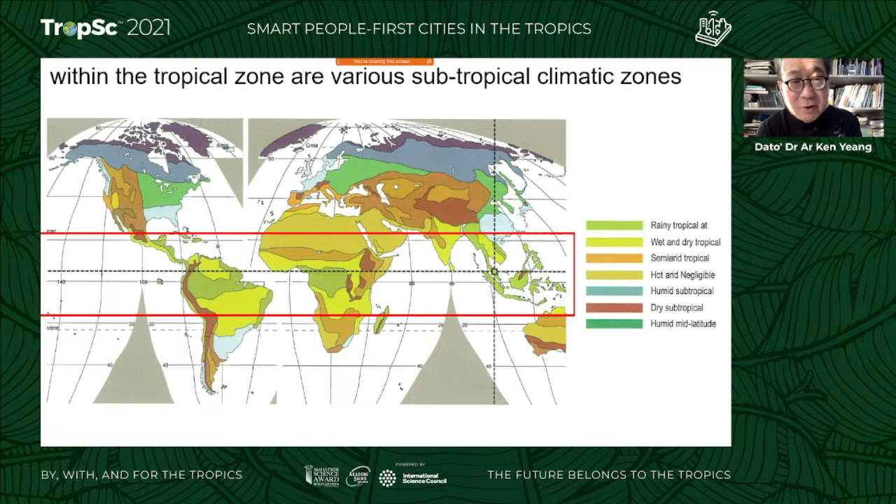Now, bioclimatic design, which is tropical design, is a subset of ecological design, and these are the key factors. Tropical design is generally built this way, but it's not exactly all the same, because you have hot humid tropical, subtropical, and coastal tropical. So even within the tropical zone there are minor variations which we have to take into consideration when designing for the tropics.

I'm going to show an example in Singapore. Singapore is about 1.2 degrees above the equator, so it's more or less spot on the equator. The temperature is more or less consistent throughout the whole year, whereas rainfall changes significantly towards the end of the year.

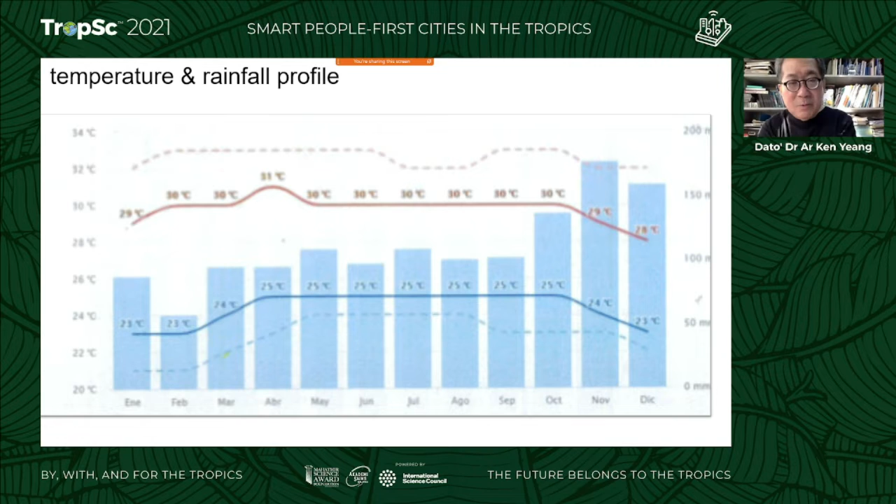So the key factors in bioclimatic design is climate—you have to design to the climate, obviously. We don't have many seasons in the hot humid tropics, whereas in other latitudes you have seasonal variations. You have rainfall, humidity, soil, insolation, wind, and acceptable levels of comfort for people, and it's variable depending on where you are and who you are.

And thus build form orientation is important because that affects building performance, building configuration, the shape of the building—whether it's rectangular, circular, or square. There's thermal control, glare, wind and natural ventilation, facade and daylight penetration, energy, and other factors.

Now, if I relate this to the other ecological design diagram, it relates to nature, human comfort, the built environment itself, and of course energy. Water is less of a factor in tropical architecture except for rain.

The easiest way to understand tropical architecture is to look at the traditional architecture of a locality, because it was built and derived through trial and error, through intuition. Here's the image of the Malay house in Malaysia. The key components of the Malay house are a perfect example of tropical architecture in the hot, humid tropics. There's a sloping roof to keep out the rain, and deep eaves to keep out the sun.

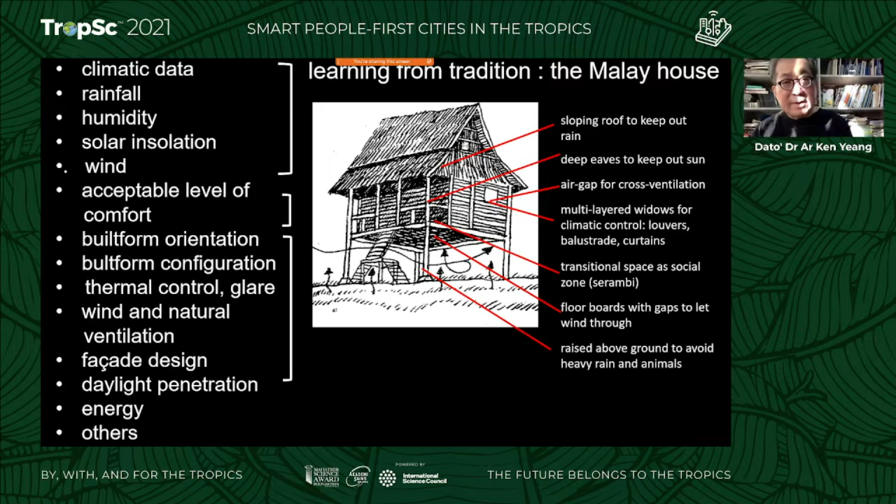And so now I'm going to give an example, a case study of a building that we just completed a few years back. It's in Putrajaya, which is the capital city of Malaysia. Putrajaya is 2.9 degrees above the equator, and it's in the rainy tropical zone.

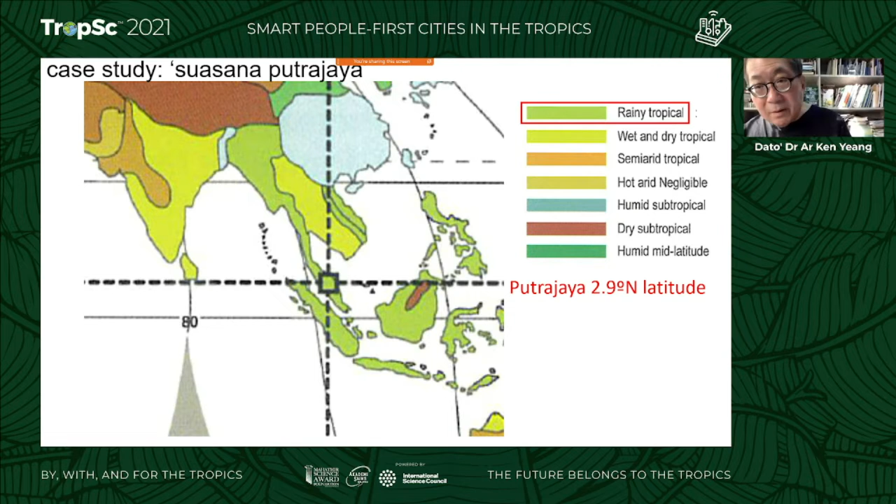On the left and right-hand side, these are the different types of tropical climates. So when you talk about tropical architecture, we need to be more specific, whether it's wet and dry tropical, semi-arid tropical, hot and negligible, humid tropical, or dry subtropical, or humid mid-latitude. This is the building that was completed about 3 years ago.

It's next to the bridge, and it is actually two almost symmetrical buildings with a gap in between. The gap is the axis between the roundabout, which is the Dataran Wawasan, leading down through the Millennium Monument by the waterfront.

Now, the traditional way of keeping out the sun is to use horizontal louvers. We wanted to experiment and try something different, so we started to explore the use of fritted glass as a shading device in the tropics.

So what we did was use glass which is not exactly butt jointed. They are put close to each other, and then they have a fritted pattern covering about 50% of the glass. To reflect Malay culture, we took the songket pattern, a traditional fabric weaving pattern, so that you're reminded of the culture of the locality, and it gives respect to the culture of the country.

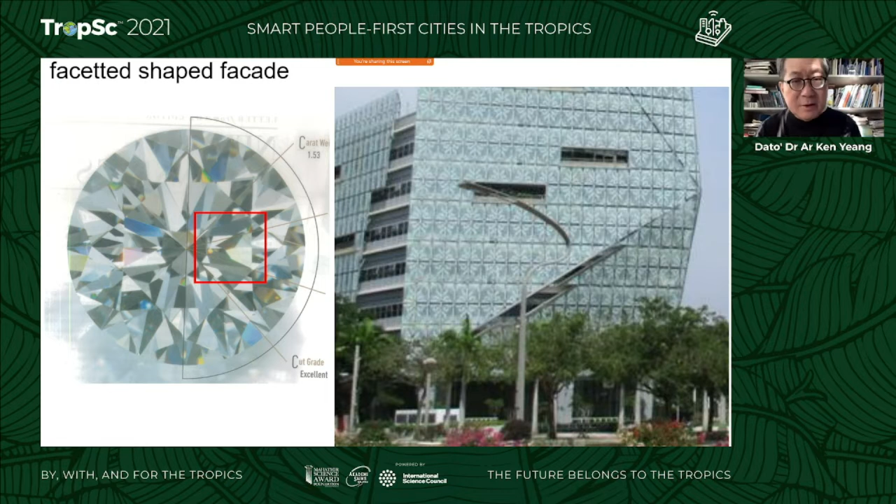Because this lies along the boulevard that leads to the Prime Minister's office, we wanted to make it upmarket, so we faceted the facade like a gem. The building is almost like a gem in Putrajaya.

Now this is a sun path in the tropics. The first thing you do in tropical architecture is look at the sun path. The sun is almost above the equator. It starts in the east, and depending on the time of year, it's a little to the north or south. A third of the time it's above the building, and a third of the time it's in the west.

But the hot time of the day is probably from 3 o'clock onwards, so we have to respond to that. Morning sun is hot, but it's not as dense and uncomfortable as the midday or afternoon sun.

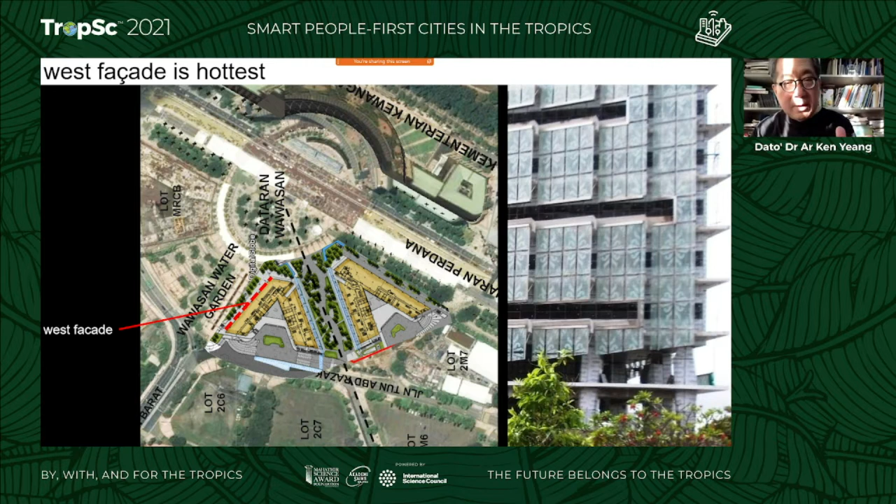This is the full west facade. The slots are where balconies stick out, so people from inside can go out to the balcony, and the balconies are to be planted. This was taken some time back, so the planting cannot be seen in this early photograph. But you can see it's not flat; it's angled to keep out the sun from the inner sides of the building.

There it is. You can see the roundabout on the right-hand side, stretching all the way down next to the monument. It lies along two axes: one is the main axis leading to the Prime Minister's office, and the other is to the monument by the waterfront.

Here's the axis to the monument. That's why the building is not one big mass, but actually two buildings, and what is left of the land effectively determines the configuration of the building. We don't want any part of the building or the center of each office space more than about 7 meters from the glass wall, otherwise daylight cannot penetrate the inside. So what we get is two asymmetrical, V-shaped buildings, and the dotted line shows the axis leading down to the monument.

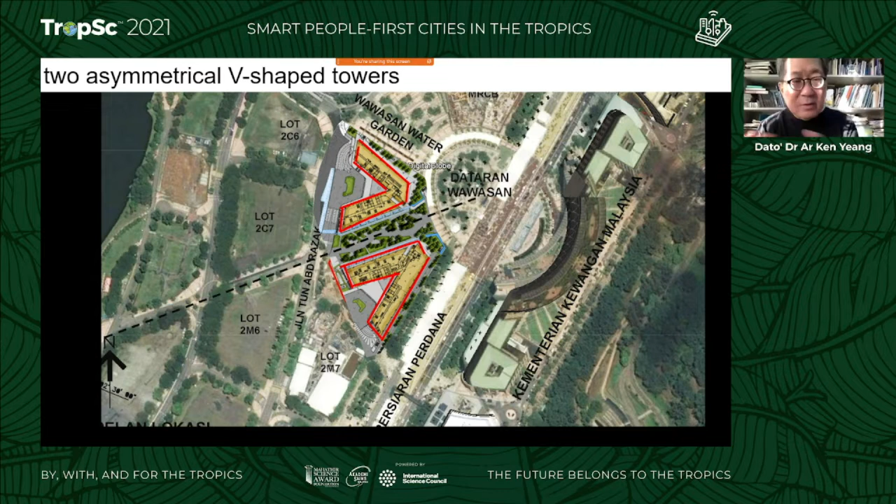So there you are. There's the monument right at the waterfront, which was also designed by us about 8 years earlier, and that explains the shape of the building, because the axis starts from the Wawasan roundabout, going all the way down to the waterfront.

And in between is the open space, the promenade, and we have a seating area. Off the promenade, underneath the building, are outlets where you can have restaurants. People can eat and drink and enjoy the space in between.

This is actually a very popular space, especially during Independence Day. So you can see the monument at the end.

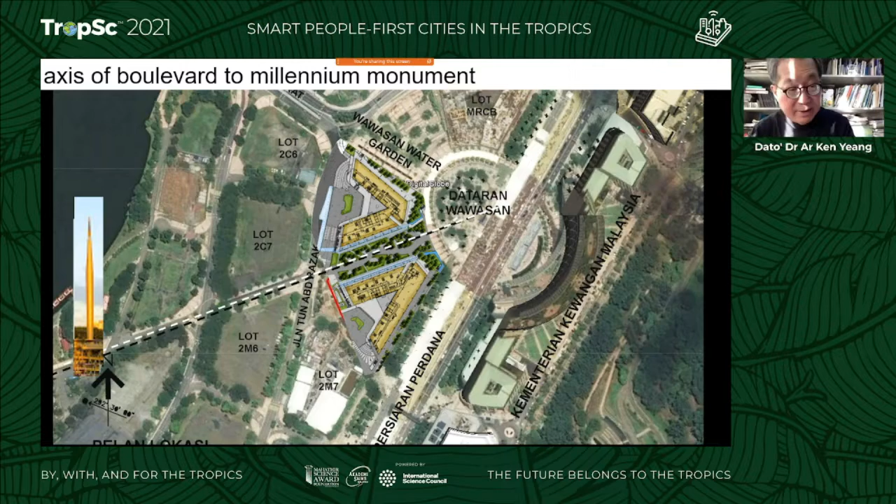Now, what is this? Sorry, you want us to end now?

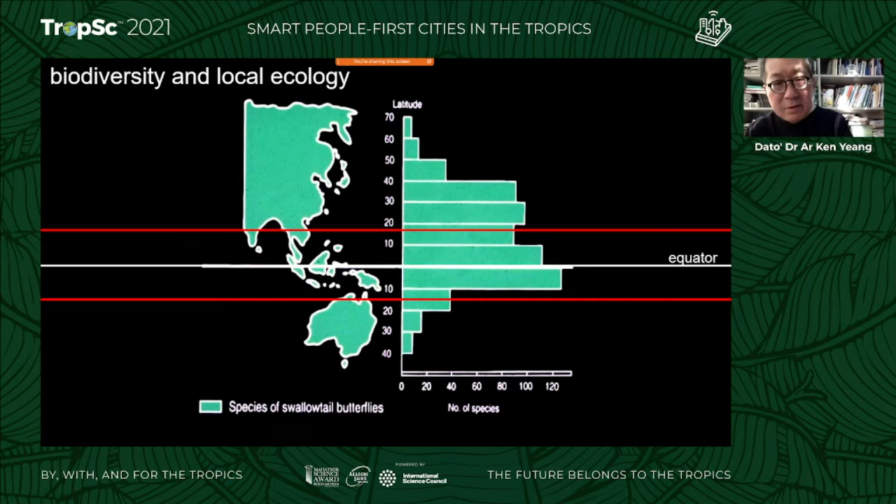Okay, so this is the biodiversity and local ecology, and you can see by the equator that the biodiversity is higher. And so to address the ecology of the planet, what we do when we design is we create habitats.

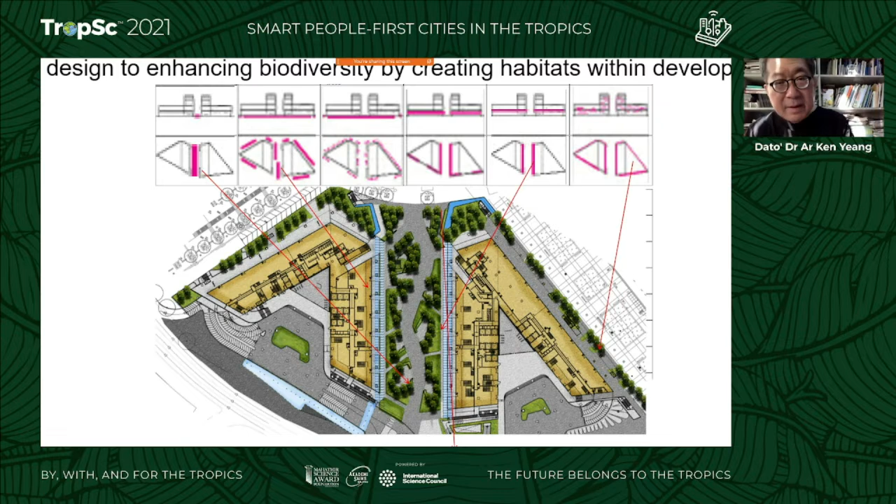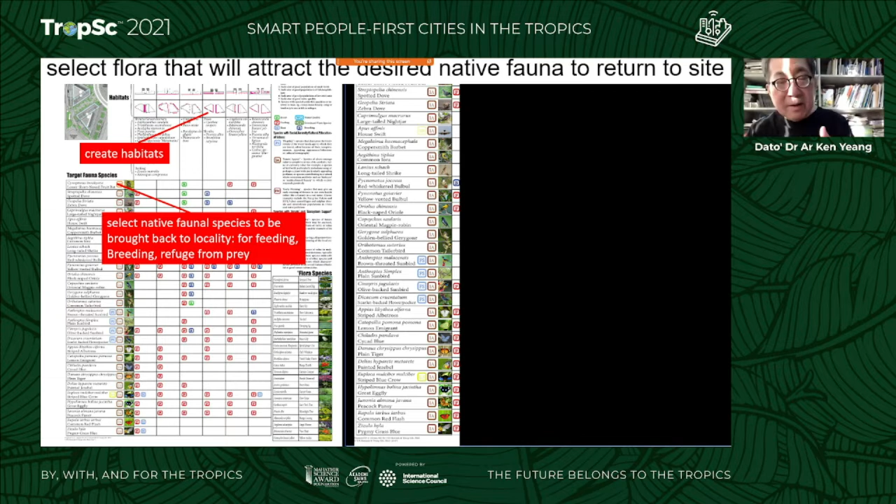On our top axis, you can see all the habitats in different parts of the building. And then we try to identify the fauna that we want to bring back into the site. From there, we identify the flora to attract the fauna. So in this way, we have a system for enhancing the biodiversity of the locality.

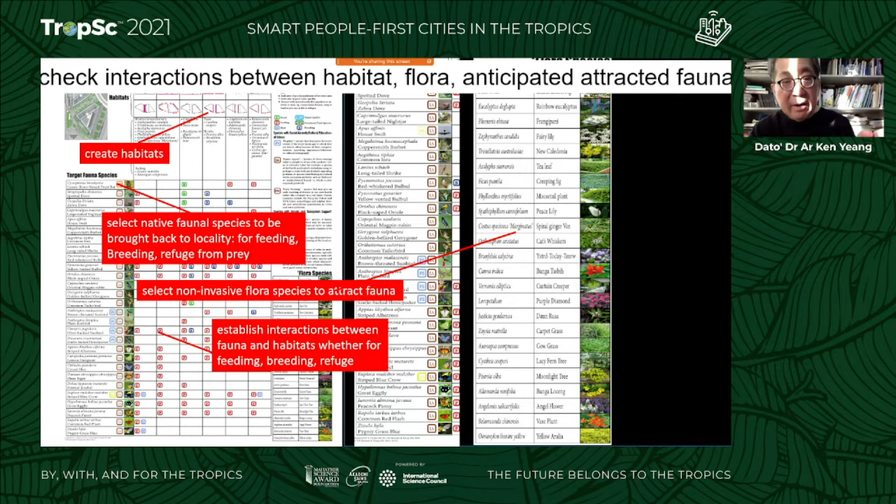But before we started the building, the land was already cleared. It was just brown soil, and they removed all the vegetation. The rainforest was there before, the palm oil was there before. So the whole idea of ecological design is to bring back biodiversity and to enhance the provision ecosystem services.

Yeah, Dr. Ken, maybe we can pause here for a while, and then when we do our discussion session we can come back to your... No, Sophia, I'll just do 2 more slides and I'll finish.

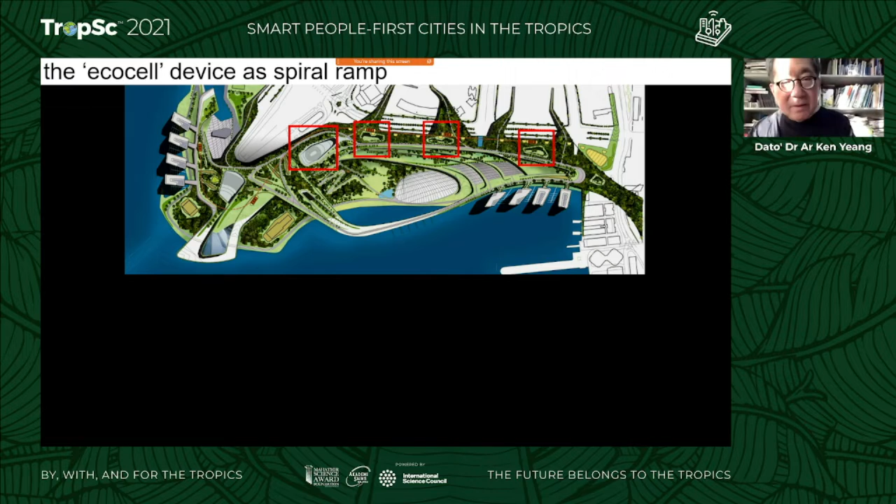One of the devices we had in the scheme is what we call the EcoCell, but we don't have time to discuss this. EcoCell brings water, natural ventilation, and daylight to inner parts of the building. This was the Kowloon waterfront scheme that we did a long time ago, a few years back.

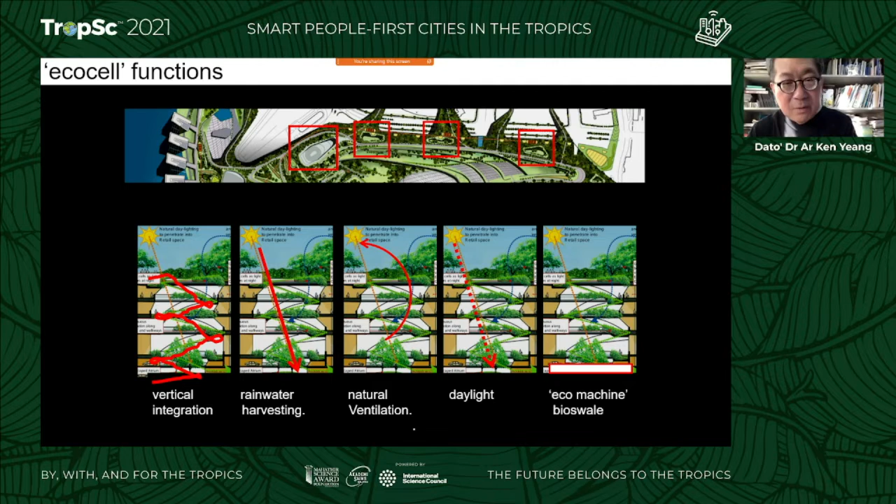But for the Putrajaya project, this is where the EcoCell is. You see, if I change the slide it will be much faster, but you want to change the slide yourself, so that slows everything down. Yeah, so this is the EcoCell that goes all the way down to the bottom of the building.

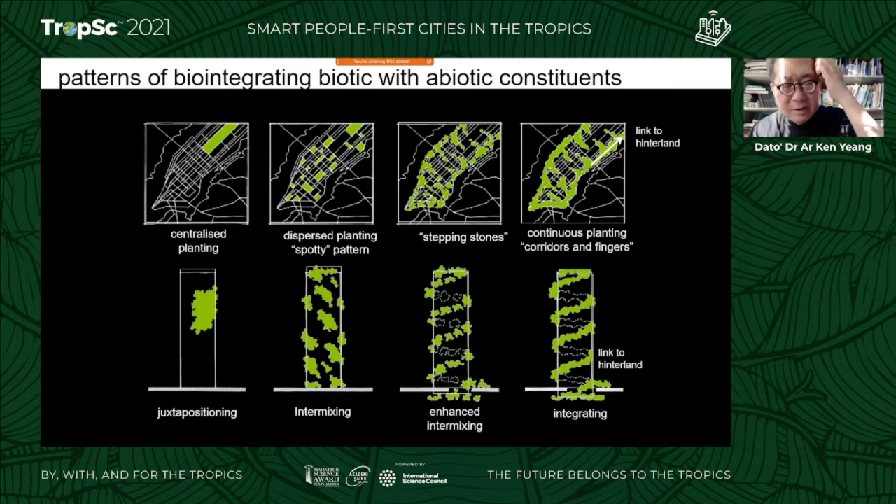And for the vertical high rise, we create habitats. This is bringing biotic constituents back into the building. These are the different patterns we use. The one that we adopted in this project is the one on the right.

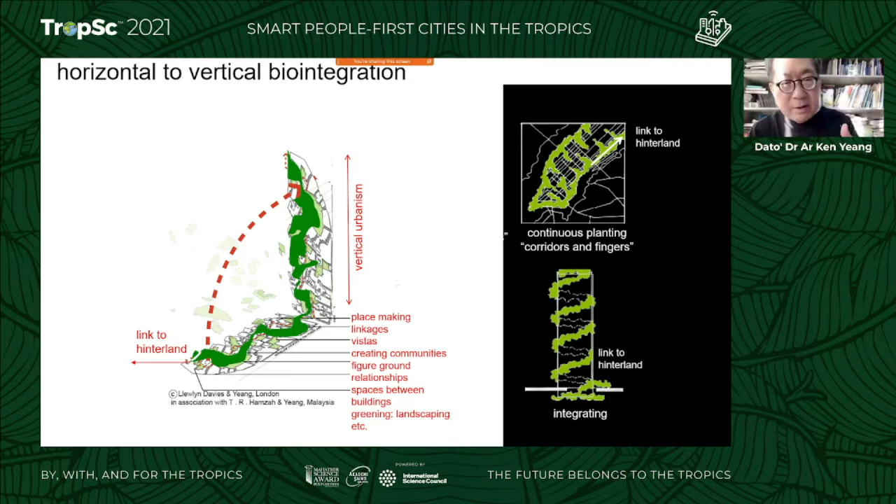So we bring the vegetation which connects just to the ground floor and all the way up to the building. These are the habitats in this building.

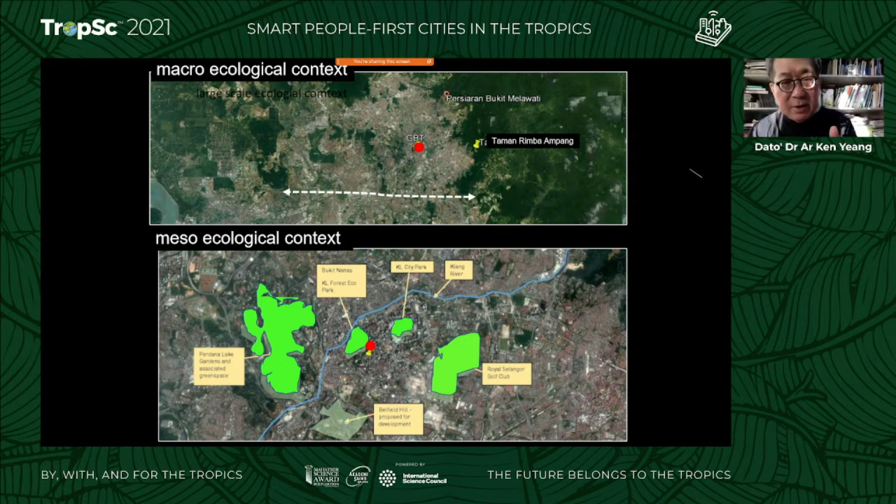For the vertical building, we look at the ecology of the locality, then we identify species - at the lower part, the dragonfly zone, the butterfly zone, the songbirds, and migratory birds. So these are the species that we want to bring back for the high rise.

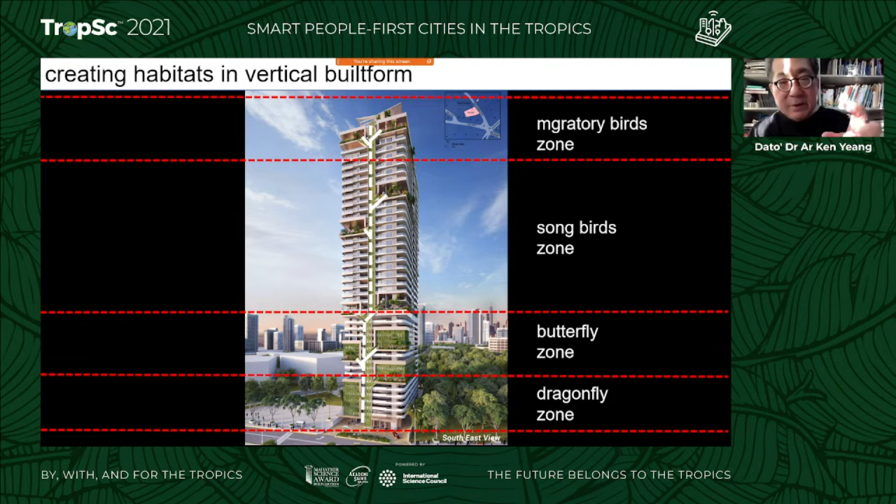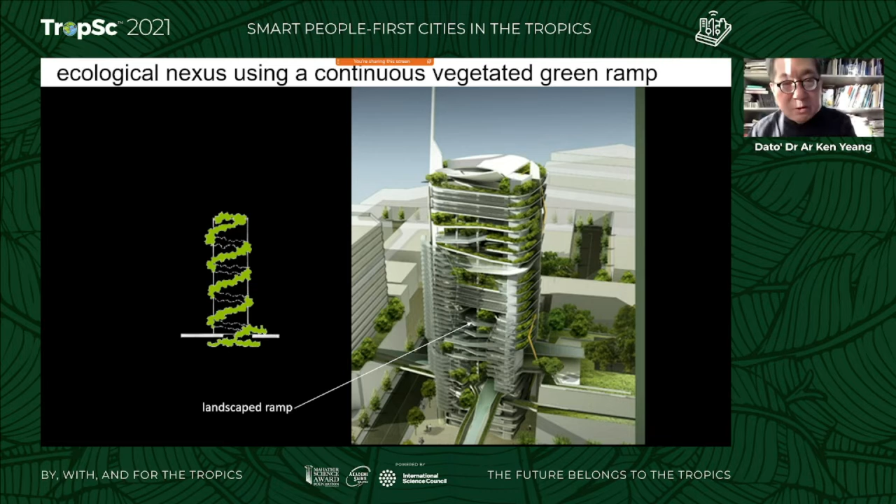This is another one where we had a winding, spiraling vegetation that goes all the way up to the top of the building.

Thank you, Dr. Ken. It's always amazing to see your work, and how you really look at how to bring nature into buildings, and how to bring the whole ecological design factors into a space where people are living. So I'd like to move on to our next panelist, Dr. Galuh. Dr. Galuh is a human geographer and also a planner by training. He works as a senior researcher at the National Research and Innovation Agency in Indonesia, and he also chairs the Social Development Division of IAAP. His work and research interests cover a number of topics, and of course, one of them is smart city.

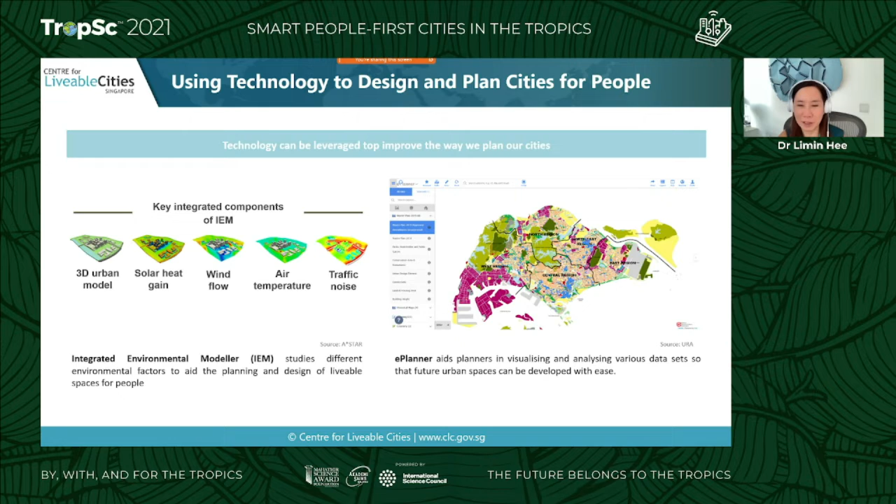In addition to our ongoing efforts in developing geospatial technologies for data-informed planning and enhancing citizens' quality of life, this approach has helped in our recent COVID responses. Platforms like URA's Space Out and NParks Safe Distance at Parks help residents make informed decisions before heading down to malls and parks during COVID times.